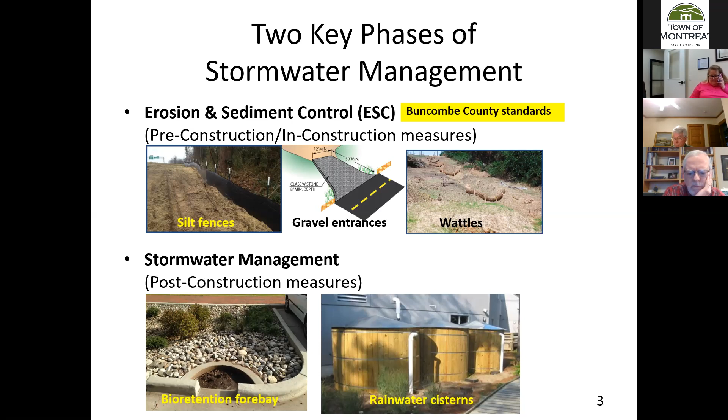Then you can have other primary classifications, Class B and what are called WS designations, that's water supply. A couple of examples here: the French Broad River is Class B. It's a little confusing, and I'm still working through understanding per se whether grades if A is best, or at least in this case, Class C is actually better than Class B.

Just assuming the French Broad is taking in a lot more ambient runoff and pollution. Two other examples here: WSIV is a very common watershed designation throughout the state, like the Catawba River in Lake Norman, Mountain Island Lake in the Charlotte area, which is Charlotte's primary drinking water source. Closer by, just over the ridge from Montreat, is Asheville's Burnett Reservoir, aka the North Fork Dam. That's a water supply 1 designation, a very high designation given that all the watershed around there is completely untouched forest.

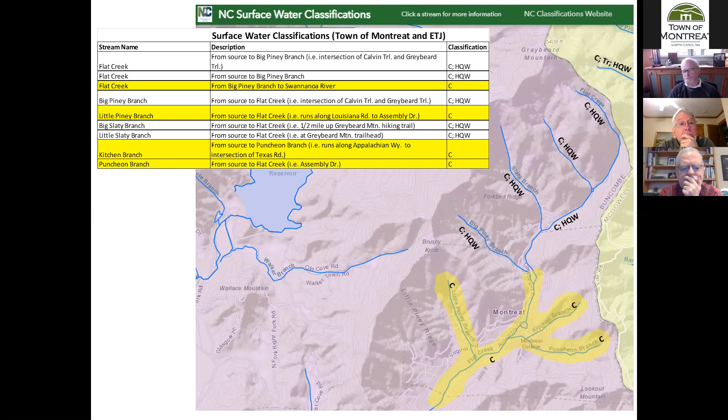I realize this is a lot of text, but I tried to highlight relevant sections. If you look right at center in the middle, Class C waters, that's what Montreat has in the majority of its quote unquote built up area in town.

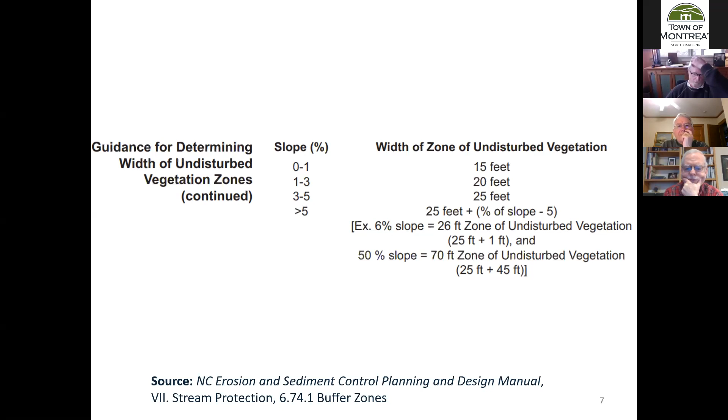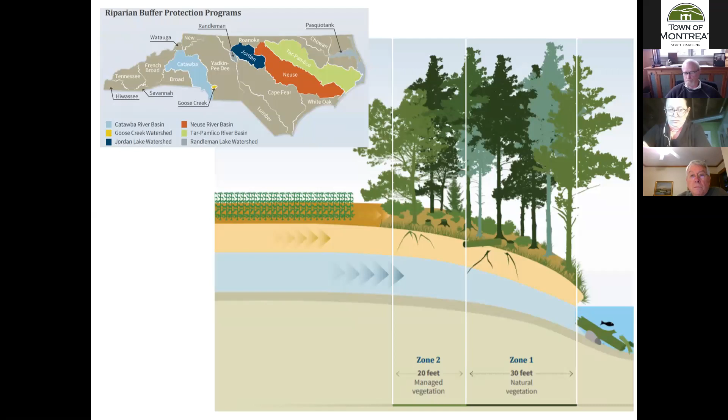So the state, at least in these river basins, has a standard of 50 feet: 20 feet of managed vegetation and 30 feet of natural vegetation. That 30-foot standard goes back to what we just saw. I won't call it an untouchable buffer, but it is a blanket standard across the state, whether or not you're in one of these designated special buffer zones, or if you're in the French Broad, Tennessee Broad, fill in the blank. Just wanted to give you a quick representation of what's going on across the state.

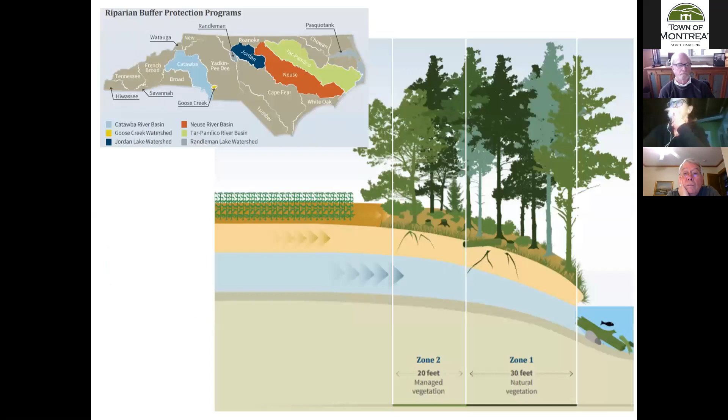I'm going to go back to that just shortly to see if that's there. Yes, so - tell me, can you all see my mouse? Yes, okay.

I've been hunting for where the 24% impervious standard comes from, at least within Montreat's ordinance. Now, my only assumption is that it's specifically referenced in areas for water supply. Montreat does not have any water supply areas. However, if this level of development is allowed in supply areas, and I'm just going out on a limb here for a moment, logic would say that level of development would at least be allowed on a Class C water body that is not designated as water supply.

Generally, most things that I have seen relating to stormwater impacts and impervious surfaces generally indicates that about 20 to 25% of built upon area is a threshold for stormwater impacts.

The last section of that chart there basically just illustrates the treatment and stormwater standards. The most common standards that I've seen are for a 1-year, 24-hour storm event, and that is for post-construction. I could redraft this chart to reflect post versus pre.

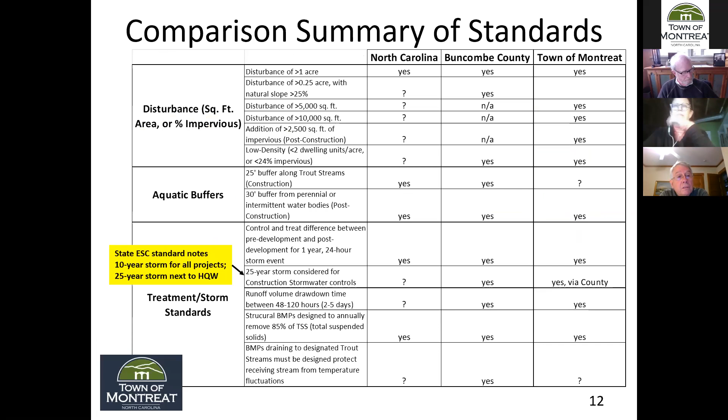The state's ESC standard - that's erosion and sediment control - so that's the pre-construction or during construction standard. Requires a 10-year storm for all projects and a 25-year storm when you're next to high quality waters. That's different than the town and the county both requiring a 25-year storm standard regardless of water quality designation.

My understanding in talking with Mary briefly, and she could maybe elaborate a little bit more on this when she's presenting, is that this is reflective of the sloped environment that we're in here in the mountains versus the rest of the state, which is relatively flat.

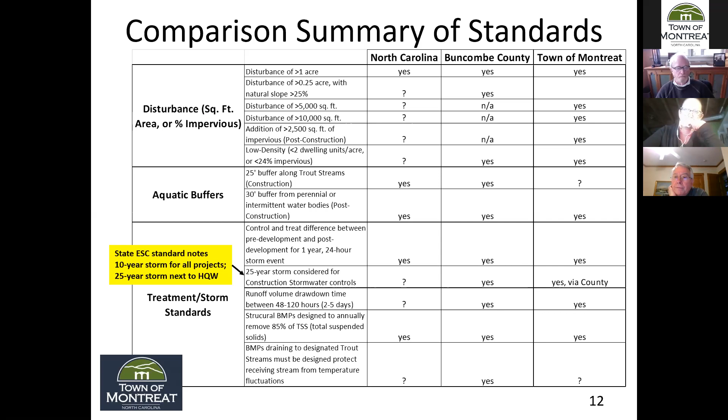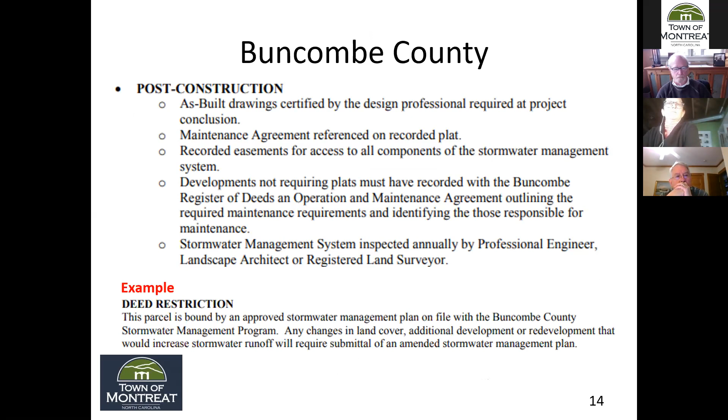Just going through the county standards one more time. It was established in 2006. That's the reason why they do it right there. These are just a couple of examples of things they're requiring. They place deed restrictions on properties when stormwater requirements have been placed on them.

They also reference 24% impervious or less. High density is considered 24% or higher. And the definition of density, I think for the purposes of Montreat, it's generally been 1 dwelling unit per acre.

Montreat, interestingly, at least the way it was historically platted, was platted on a much more urban format of basically quarter acre and smaller lots. If you look through much of what I'll call the main street of Montreat, on Assembly there, most of those lots are basically 50 by 100 or 50 by 150 foot city lots. So that's just a little nugget of information for you to keep in your head, thinking about the size and impacts of projects.

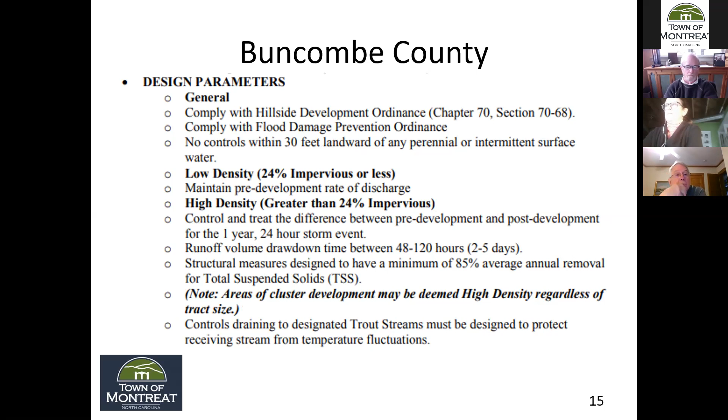So again, on the front end, the county's erosion and sediment control distinguishes 2 different factors: either land size impacted - 1 acre or more - or the slope of the property regardless of the property size. That second bullet there is important to note. The 25-year storm is what they are requiring during erosion sediment control.

They are also looking at post-construction. This is on the back end after you've built something, and the stormwater requirements for something after it's built. Their definition of low density is 2 units per acre or 24% impervious area. They're looking at the 1-year, 24-hour storm.

They do list that last bullet: all impervious surfaces must be a minimum of 30 feet from water bodies. Essentially, top of bank on a stream. In essence, after you have built something, it's a 30-foot buffer away from that.

Just a quick reference that for the town, the front end stormwater, the soil erosion and sediment control, that's entirely with the county. The town has its own stormwater ordinance currently. These are just some of the definitions from it.

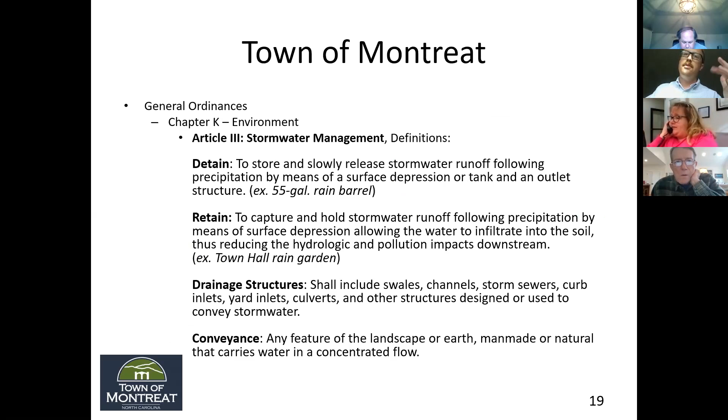These are the 3 primary triggers: disturbing 5,000 square feet or more, or 24% of total lot area, or 2,500 square feet of additional impervious surface. These are just the requirements of the stormwater plan.

This is from the town's current ordinance, differentiating large versus smaller development projects. General standards for the town do reflect the 30-foot buffer from top of bank for perennial and intermittent water bodies.

The hillside development standards. Scott, can you go back 2 slides? Because I think at our last meeting Mason raised the question on whether the actual provisions of the ordinance applied to lots that were less than 10,000 square feet.

As I recall, there was a part of it that looked like there was an imposition of that, but the actual language was greater than 10,000 feet.

That's right. The provision in the ordinance requiring the retention and treatment of stormwater based on the storm standard is only under the section of—I forget the section—but it's only under the larger project description. That specific retention requirement is not applicable to the smaller development projects.

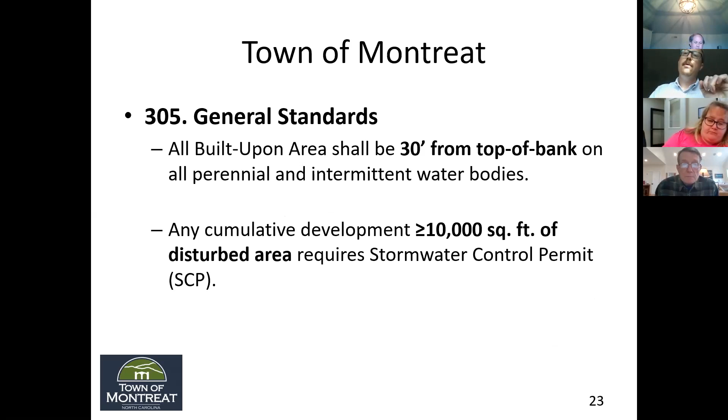The hillside development standards—I guess the complicating factor there is that it's got intensity bonuses for impervious area that may or may not be indexed to the stormwater ordinance. I haven't been able to see a clear connection between those two, but that's another item I'm noting right now to follow up on.

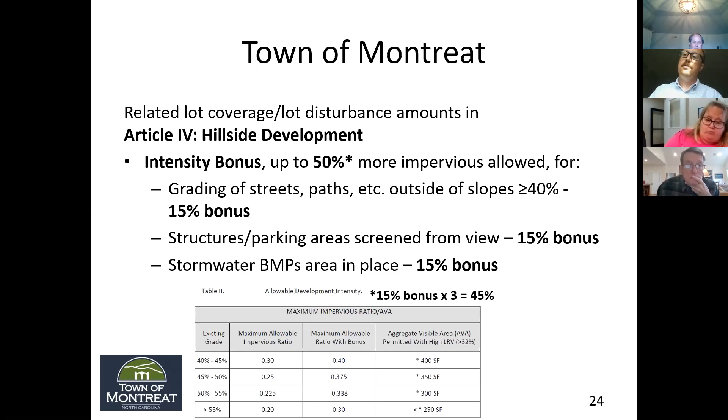Again, just quickly going through the post-construction standards: it's treating the first inch of rainfall for a 1-year, 24-hour storm, and I believe that was it. So with that, I'm glad to quickly go back through any of the slides or have any brief discussion before we move on to Mary's presentation.

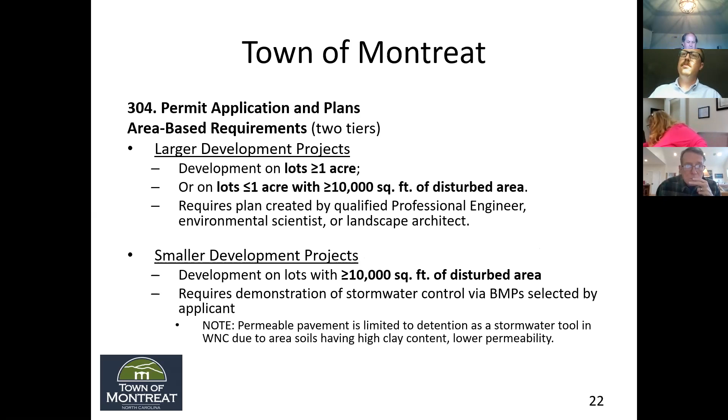Yes, the standard on impervious exceeding 24% of the lot requires a stormwater plan. Is that true or not true? One moment, let's see.

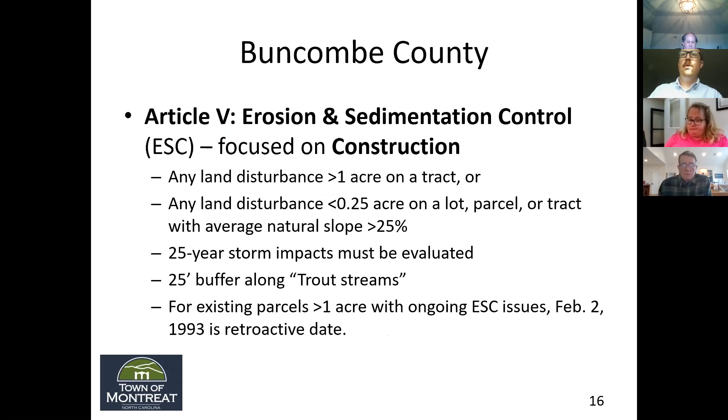Per the requirements of the permit, 24% or more impervious currently requires a stormwater control permit. That's what I based my exhibit on in my presentation a few meetings ago.

I think Mason's raising the thought that once you start looking at the 2,500 feet or more, that's in conflict with this 24%, and maybe that means you ignore that 24%.

I'm not sure. As I'm staring at these three sets of standards right now, I don't know if I'm having a moment of clarity, but if I'm seeing this first bullet as disturbed area 5,000 square feet, when I hear disturbed area, my mind immediately goes to erosion and sediment control. So the second bullet is the long-term build out, that's post-construction stormwater. That last bullet is impervious, so again that is long-term stormwater impacts.

But Scott, that's not what the Montreat ordinance talks about. It doesn't differentiate that. It differentiates into larger projects and smaller projects, and requirements of larger projects and requirements of smaller projects. Right, but as drafted.

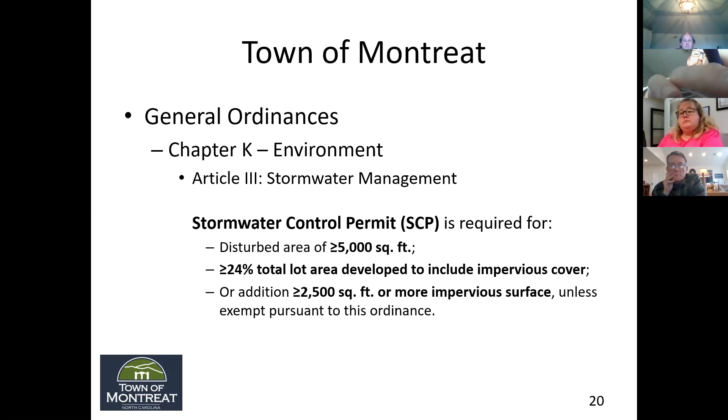That'd be great if you could bring some of that information back. Thinking of the timing, I heard Tom Widmer say the council intended to take up the zoning ordinance revisions as part of its planning process. I got the impression that would extend over a couple of months, so there's no real urgency to get the stormwater ordinance done until they're finished with that. So I think the timelines work well, and particularly if we could know what Buncombe County was doing, that'd certainly be helpful to us.

Victoria Hoyland is the new stormwater administrator for Buncombe County, and she reached out to me in early December. I said hey, and we'll follow back up. This would be a good opportunity to follow up with her and talk in more detail, in the context of Montreat's ordinance, which I haven't looked at in detail yet. But I'd certainly like to have a conversation with her.

One of the issues in your earlier slide was the 30-foot buffer from the top of the stream bank. That's for all lots in Montreat, but for the state it's only for lots 1 acre or more. For Buncombe County, it's also only for 1 acre or more. But Montreat is applying it to its small quarter-acre lots.

As I've stated before, on a 1 acre lot you can adjust your development to not be too close to a stream. On a quarter-acre lot, if you've got an intermittent stream that has water in it sometimes, that winds up taking the entire lot with a 100% setback. The state and the county found it reasonable that this would apply to lots 1 acre or more.

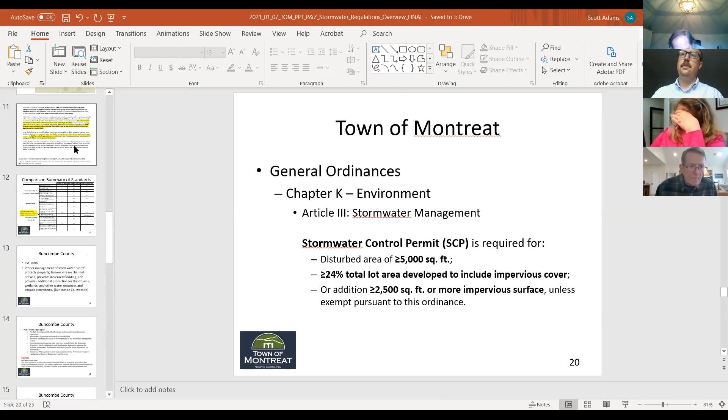Correct, yeah, let me go back to it right quick. Major variances covering impacts to the inner zone, i.e. the 30-foot buffer closest to the water, are allowed. And then the second sentence covers management of flows and mitigation of the impacts. So my quick reading is that you can essentially be closer as long as you are mitigating your quantity of stormwater coming off. That's not in our ordinance though, and so the prior zoning administrator said, tough luck.

My goal is to clarify that here and now with you all. Does anybody else have any other questions, or should we move on to Mary's presentation on some more specifics for Montreat?

Let's move on. Okay, let me stop my share. And I'll say I did not prepare a presentation as such.

My understanding was that you shared my slides at the last planning and zoning meeting that gave the high level overview of the work that Blue Earth is doing and why. You did that, you laid that groundwork. That's correct, I did.

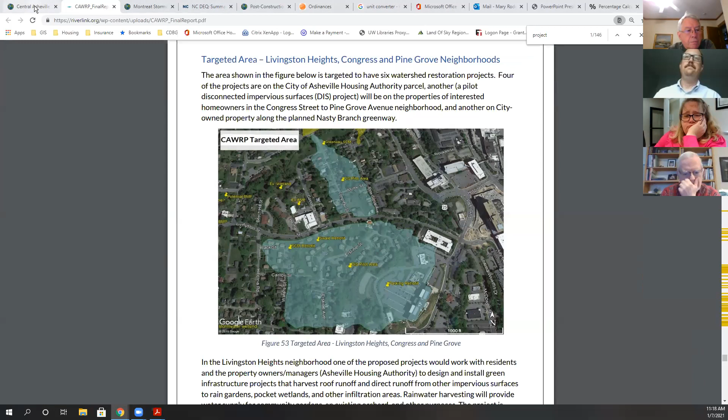Okay, first of all, I'm going to go back to the actual report, the interactive report, which is more fun to look at, and hope that when I try to reload the priority project page this time—actually, before I do that, we will not have this deliverable, I should say. This is an interactive online watershed plan, and that's not what we're looking at for our concept plan. It's much more focused on stormwater itself—one of these tabs is stormwater runoff.

We're not as concerned about illicit discharges in your community. Certainly flooding occurs, and that is linked to stormwater, but it's not the riverine flooding that they're also looking at here. So this is kind of high level.

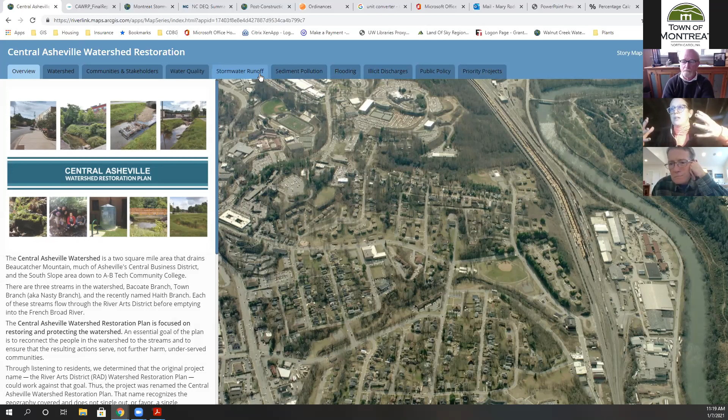This is a full-blown watershed plan, and the Upper Swannanoa River watershed plan that we worked with Equinox on in 2014 technically fills this role for DEQ's purposes and covers Montreat. But my argument to DEQ when I went back for more money is that none of the projects they identified were in Montreat. They were all Black Mountain, and all in flat areas of Black Mountain, so they didn't address the unique terrain of Montreat.

So I said it would strengthen our watershed plan if we went back and did a very specific steep slope stormwater management concept plan. And I emphasize the term concept, because they're not getting into the construction or even the design level that you would need to build. That would be a next step, where we identify a few high impact projects.

Wade, I agree that there's on one side what every homeowner does with their property, and there's a lot of those properties, so that adds up. But there's also clear issues that a kind of targeted project could address, and we can seek funding to implement that. The actual construction-level designs would be done within that context.

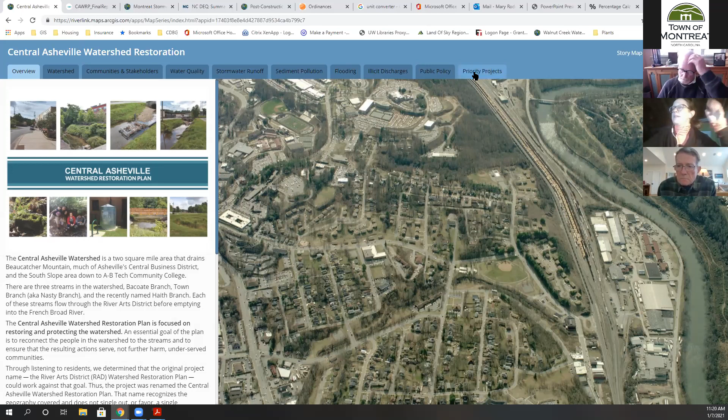So what they've done here is also identify these kind of potential priority projects in this watershed, and I do expect something similar. I'm afraid it's going to do what it did before and not actually show me any of the projects. Oh, yay, it's showing them now. Okay, they're coming.

All right, so you should see this colorful little map here. It's got sub-watersheds, and again, this is Central Asheville right below downtown. Within each of the sub-watersheds, they've identified the yellow diamond as a stormwater control measure, like a detention or bioretention measure. Those things are harder in Montreat because there's not a lot of public right-of-way. But we talked about the potential, and this is something we'll come back to y'all with.

Maybe reducing the size of that gravel parking lot up by the Public Works facility, for example. Since that's no longer town hall, if that parking lot doesn't need to be as large as it is, could something be done there to help deal with the runoff from Rainbow Road?

We were just kicking around a few ideas, but they're just starting that process, which is why they're not here presenting to you today, because they don't have those projects clearly defined yet. But stormwater control measures, like a rain garden, y'all have at Town Hall now. Again, those are harder to do in the steep slope environment.

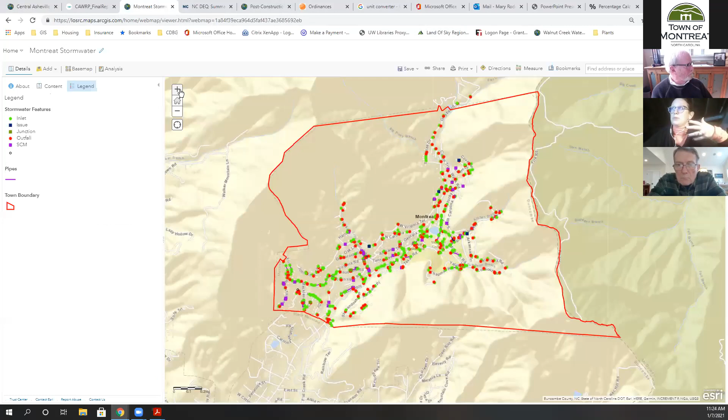That analysis comes from both - I'm going to switch screens now, switch maps. It comes from the stormwater inventory that my colleague John did together with Public Works, going out and geolocating every inlet, every outfall, all of the pipes. I have to zoom in more so you can see the pipes. So we have your entire stormwater system inventory here.

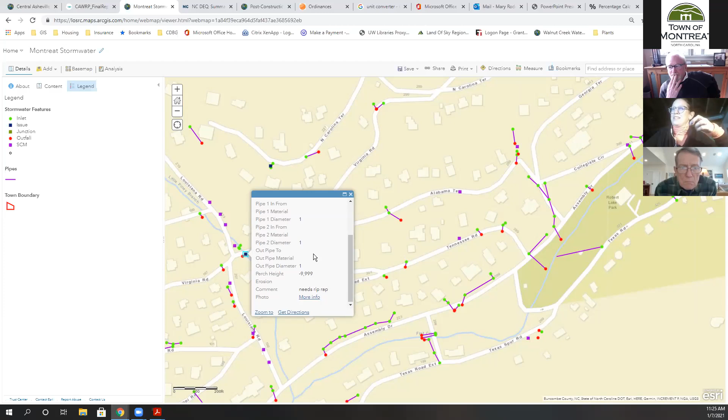John did document some issues. Let's click on one of these. What is it? Needs riprap. That's John's note. That may not necessarily be what they recommend, because sometimes riprap can actually increase the problem downstream. I think that's a go-to, but it's not necessarily what Blue Earth will recommend.

But they - Mary, go ahead. The one thing that Wade included in his presentation, as I recall, was the idea of a quote 'regional' unquote retention area - and I don't mean for the whole region, but for a region within Montreat, instead of requiring retention on each individual lot, that there could be flowing into a larger area. Is that something y'all have talked about, or should we just put it on our discussion list? I can certainly bring that back to them.

Wade, you met with them, so you can speak to what y'all discussed. I mean, I'd say it's still always going to be a combination of both, even if I would assume there's not a large enough area, and the watershed doesn't drain in a way that you could capture all the runoff from all the properties, right? Even if you did have some sort of community retention facility.

My concern there too would be - I think that's certainly something to talk about. I can't think of where that would go, right? I think there's a ball field somewhere. I'm sure they won't necessarily want us to turn that into that type of facility.

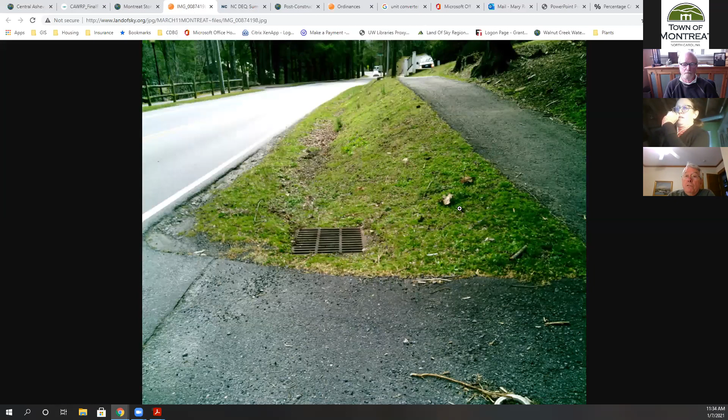Mary, as you make that turn, is there a possibility we can also get you to send those charts to us so we'll be able to view them?

Yeah, so this map is public, so you should be able to access it - did I include the link in my previous message? I'll check, but I'll make sure to give it to Scott and he can include it in your minutes, or however is easiest.

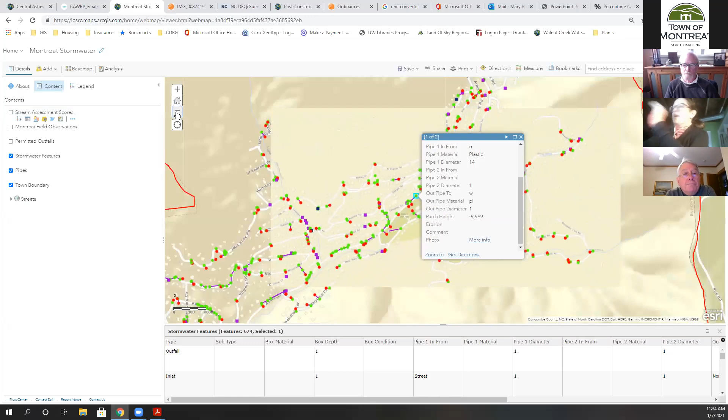That's great - if he could print it off, some of us would like to see it on paper rather than. Oh, okay, but yeah, that would be something Scott could do. I can help assist in talking through it, since we don't have a print of it. But I think you'll have to print it in quadrants to get the level of detail.

One thing about the interactive map is you can go into it - this is something you can look at. So this is something they're using - oh neat, sure, oh that's great - you can see kind of how water's being diverted into this.

I wanted an outfall though, I keep picking the wrong thing - I just closed the wrong one, sorry. I wanted to show you outfalls because that's what they're looking at in terms of seeing how the stormwater is impacting the creeks.

I like those images, they're interesting. I'll have to log back into our system to find the link, but yes, we will make sure you have access to that map in a print form. I can walk you through printing it at a useful scale so you have it in your office. Well, the electronic link is helpful because, as you just showed, we could see what the particular facility looks like. That's great.

So that was kind of the first big milestone of the project. And then the stream assessment they did is the next component, and ongoing is the water quality monitoring that Josh Holbrook is doing. He's a professor at Montreat College, and he's also working with the Montreat stream team and Bill Seaman.

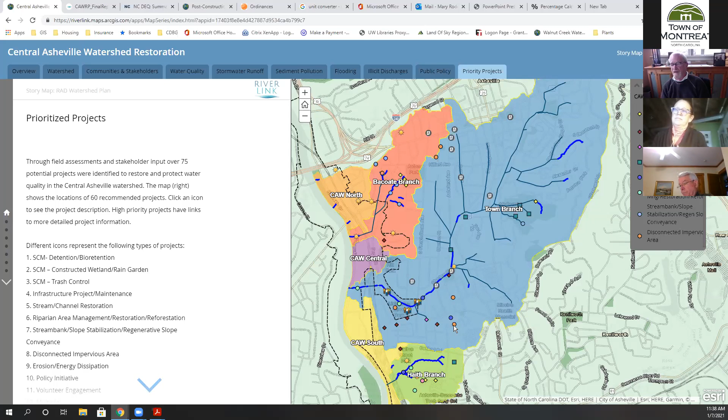So when you were trying to find the outfalls, those are the challenges. But the outfalls are basically going into a stream everywhere right away. Right, and so that's where it needs to be more of a master plan, where you identify areas that are the easiest to capture, and capture the most muck for the buck. I like that.

And potentially shift the maintenance work - I think that's a good conversation for Blue Earth to have with Public Works. I don't think they know where their big maintenance headaches related to stormwater are. There's every catch basin thing, but are there particular areas where they're noticing they're having to do a lot, and could that effort be reduced and moved more to a maintenance component rather than reactionary - a big storm happens and we have to spend a bunch of time and energy cleaning this up? Can we maintain it with less effort over time, and avoid that big impact down the road that we have to deal with?

So I like that, and I will, if they have not talked to Public Works already, ask them to do so. I believe they should, at least in terms of where Public Works is seeing issues, because they're obviously the ones on the ground dealing with it.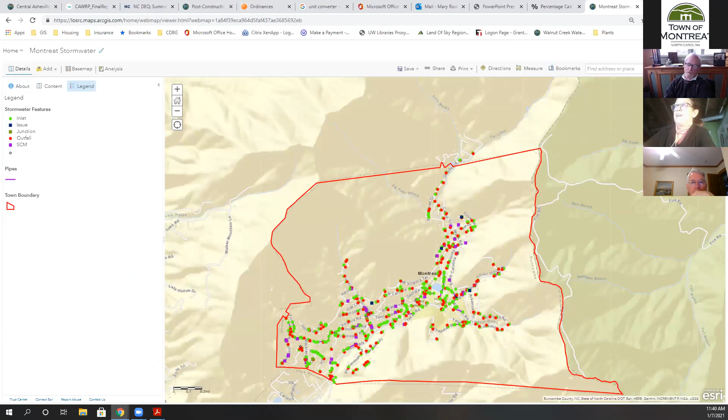John had a lot of good things to say. Is his name Mike, is that one of the guys? He said he was very engaged in this process of finding the infrastructure, really taking notes about what condition it's in.

Okay, so this one's inactive. I'm finally clicking on the right color, the reds. Needs cleaning. So yeah, there it is. It's hard to see, but this little guy down here, that's the outfall, and it does need cleaning.

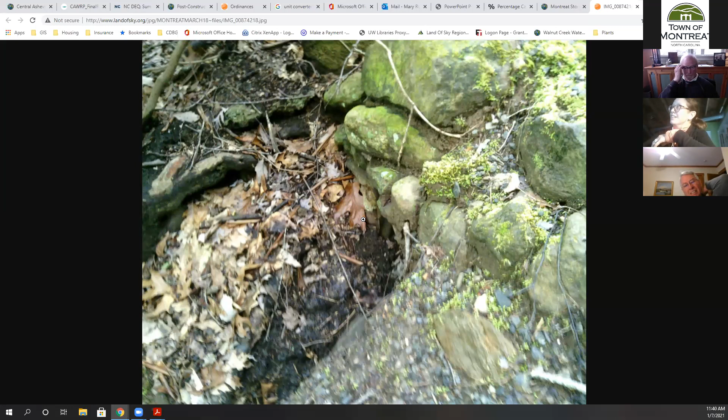So anyway, yeah, I agree. John said Mike was super duper, yeah, he was on it.

So, okay, well, I think are we running long? I apologize for that if we are. That's fine, I don't know what you can do now in between of what you're going to learn from the Asheville project, that'll probably be more helpful. Yep, facilities themselves. So I found this very fascinating and interesting.

Well, I will certainly follow up on both, the task force - we were supposed to meet yesterday, but the Public Works Director is participating and he wasn't available, so we will be meeting this month. I'll have a better idea of where the ordinance subcommittee is, and I will reach out to Victoria Hoyland, the Stormwater Administrator for Buncombe County, this week and set up a meeting to talk with her as well.

Right, right. And kind of some of these things like 30-foot buffer variances, smaller - I mean, they do have smaller lots too. Kind of what is she seeing? How are they managing that?

And then in terms of the Blue Earth team, talking about this Blue Street concept, these retention options within the switchbacks, and these two potential areas of retention that Wade mentioned. Okay, yeah, that'd be very helpful. Anybody have any questions or comments?